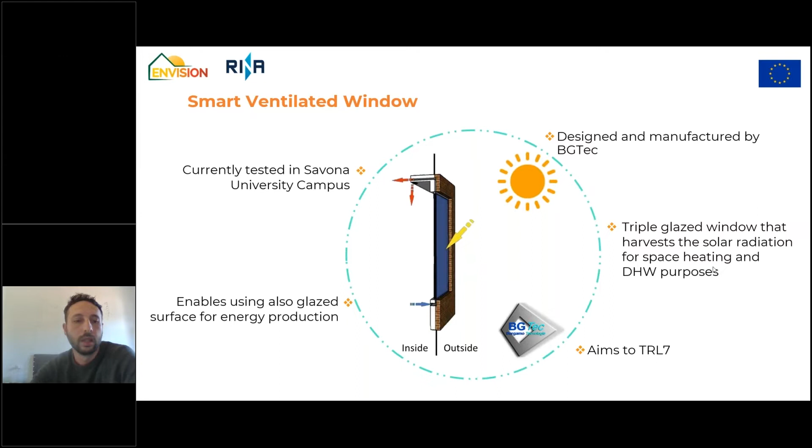This is just a brief introduction of the concept and working of this technology. This technology operates in 2 conditions. The first is winter mode, where the indoor air is heated up inside the window to provide warm air for the indoor ambient. The second configuration is summer mode, where the aim is to produce warm or hot water for domestic hot water purposes, or if needed, for preheating for heat pumps and so on.

During winter mode, we heat up the indoor air. When we move to summer mode, we use the outdoor air, and by heating up this outdoor air, we give this heat to the water cycle circuit, turning on the pump so that we are able to provide hot water for the needs.

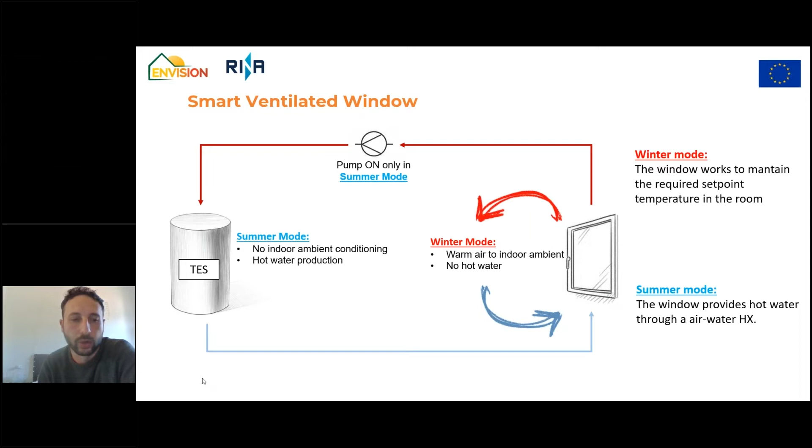A brief presentation and description of the technology. This technology is mainly developed and manufactured by BGTec with the support of some partners regarding the automation of the system. The main aim of this technology is to use the glazed surface of an envelope in order to provide heat from the solar radiation.

One of the main inputs we developed inside this project is an automated system control in order to provide heat inside the room at the required temperature using a set point, a thermostatic control. At the same time, we are able to switch automatically from winter mode to summer mode, depending on the temperatures inside the window and the required temperature inside the room.

The main innovation of this technology is that we are able to provide heat using the glazed surfaces of a building, but at the same time reduce the energy demand of a building thanks to this triple glazed unit. We are also going to test the impact of having this flow rate in the chamber of the window, which can be even better in terms of insulation for the building.

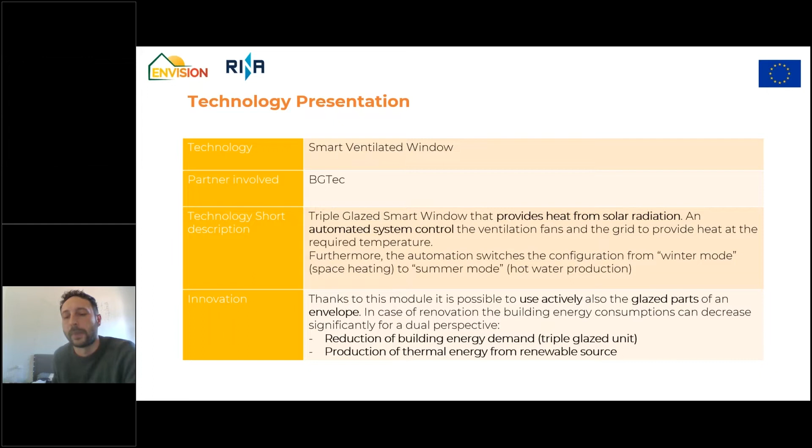The potential of this technology, we think, is mainly for offices or terminal buildings, but in general every kind of structure or envelope with a large glazed surface. We can implement this technology in both public and residential buildings, and as well in case of retrofitting, the renovation of old buildings, but also in new constructions.

BGTec has already developed a market trend study starting from next year in order to understand the possible value on the market and the request from the market for these technologies. Potential customers are similar, I think, to all the other technologies that have been presented inside this event.

Mainly private building owners, but also social housing companies. I think that having a good interaction with architects and engineers is probably the best way to introduce this technology into the market, without the risk of making the customer quite scared about the implementation. With the help of architects and engineers, we should be able to make this easier for the final customer.

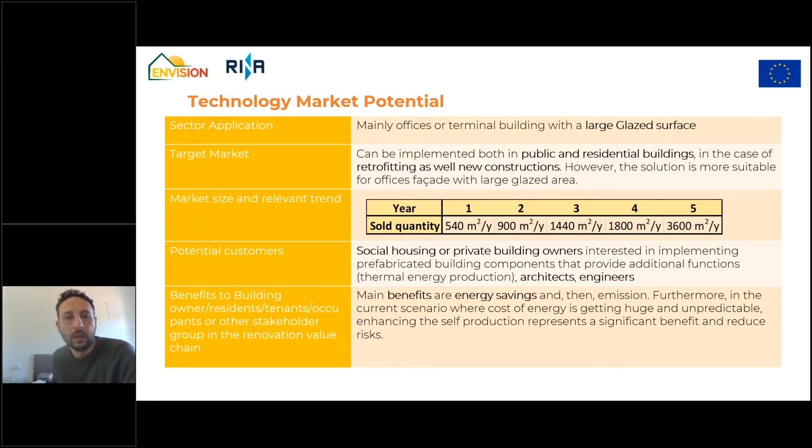Now let's move to more practical things: how the design and installation phase has been done. Here I would just like to show you some pictures from one of the installations that has been done by BGTec. This is from their headquarters in Poland.

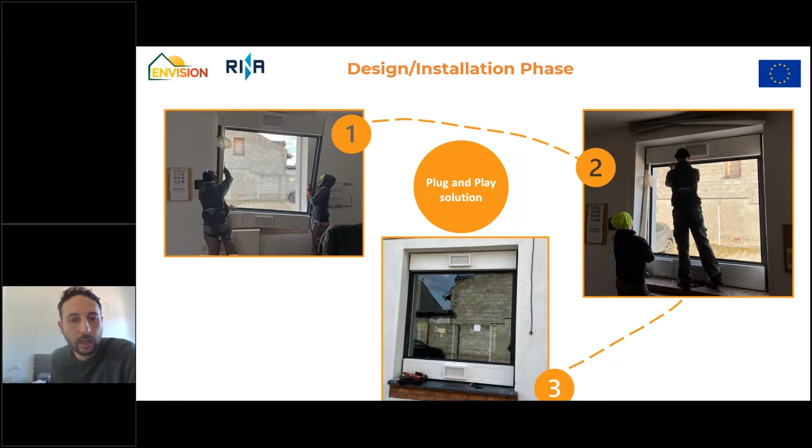As you can see, the installation of this technology is quite simple. It's a plug and play solution. In just three steps, you are able to install this technology, so the impact on the comfort of the tenants is minimal. In one day, they are able to complete the installation without any risk for the tenants.

And then I will just like to focus on the real demo site of ENVISION, that is the Savona campus demo site, where the window has been installed for testing it. So here you have the external view, the internal view.

As you can see, we have tried to maximize the glazed surface of the window, so we have quite a different aspect. If we compare this to the other window that you can see here, the other window is quite different, but in this case we wanted to maximize the glazed surface.

We have just started this testing campaign, from March 2022, and we are going to end this testing campaign in September 2022. That is going to be the end of the project.

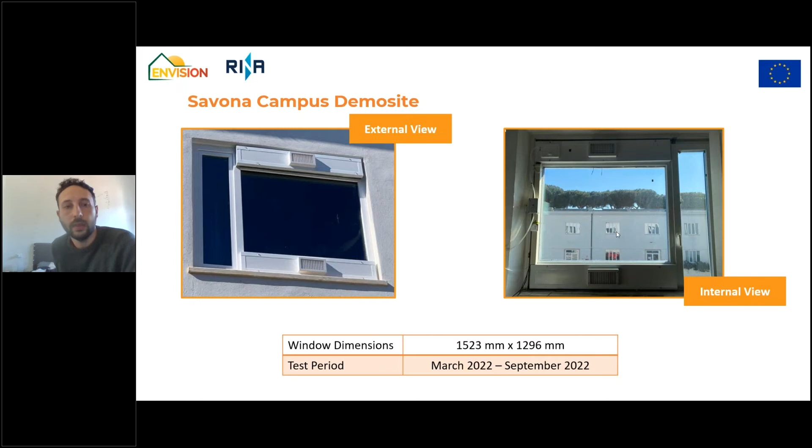So here you can see the behavior and the components of the technology of the window. On the left side is the water circuit filled with water and glycol that is going to be used in the summer mode, and also the pump right here inside this box. On the top part of the window, you can see the box where there is the control system, and then the two grids on the indoor side.

So the suction grid and the blowing grid. The air comes into this grid and is blown from the upper part of the window. During the summer, as I said, the indoor grids are closed and the ones in the outdoor part are opened, so that we recirculate the outdoor air inside the chamber of the window.

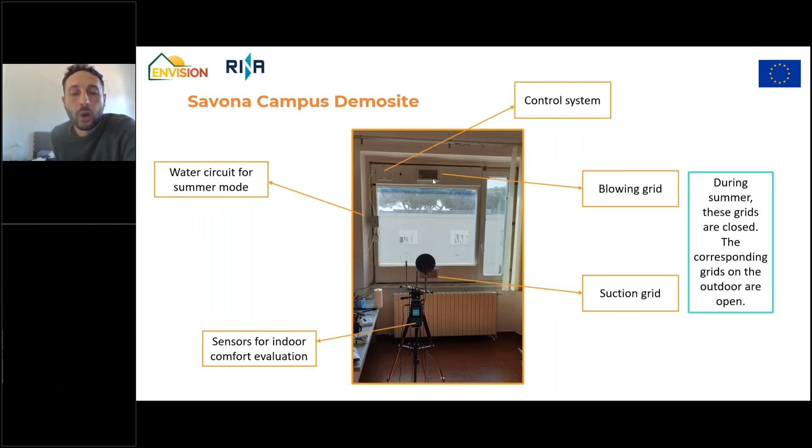In order to test properly all the performances of this system, we have also installed a sensor that you can see right here for evaluating the impact on the indoor comfort of this technology. With this sensor, we are going to see if there is any impact, really in reality, on the comfort of the occupants of this room.

Let's move now to the expected energy benefits that we hope to reach with these technologies. So we expect to have something like 140 kilowatt thermal energy production per square meter when we talk about a south-oriented facade on an annual period.

This leads, of course, at the same time to a saving of around 32 kilograms of CO2 if we think that this energy is usually produced by a gas boiler, a standard gas boiler.

And we have tried to estimate what can be the ratio between the surface of the window compared to the surface of the building, the floor area of the building, in order to understand when the thermal consumption of the building could be, on a yearly basis, completely supplied by the window.

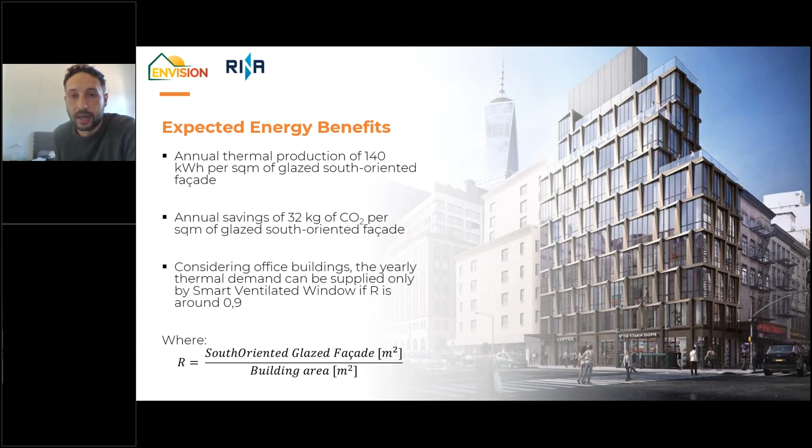And we have seen that this ratio is quite large, so that's why we suggest and expect that the main exploitation of this technology can be used in very large glazed surfaces, something like terminals or skyscrapers and something like this.

Then, of course, if we have energy benefits, we will have also economic benefits, and this is what is important to share more with the customer, because sometimes they are more interested in the economic savings despite the energy. They don't have the same feeling for just energy saving and emission saving.

So we have estimated the cost of around 300 euro per square meter of glazed surface for this technology, and so the expected payback time is around 23 years. Considering that the lifetime of this technology can be expected around 25, even 30 years, this is quite a good result.

But we have also to consider that if you take into account also the increasing cost of energy, probably this payback time can also decrease. But we have also to think about the impact that this energy cost can have on the production of this technology. We expect that the balance of costs will lead to a reduction of the payback time.

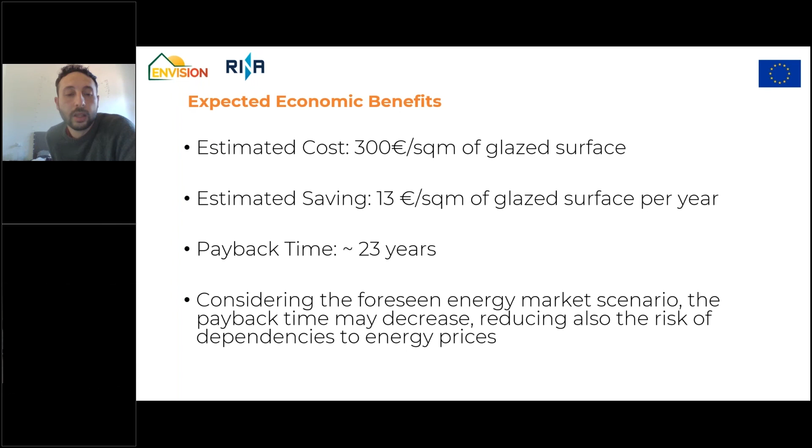Just as a conclusion, before I leave the floor for any questions about this technology: we think that having the chance of using this technology, this window, could represent a really relevant step toward the goal of zero energy buildings, since we are going to be able to use also the glazed surfaces for thermal energy production.

The aim of the test campaign that we are doing at the Savona demo site is to have real performances on the field about this technology, and being sure that the expectations that we have from the modelization and simulation of this technology are real also in the test campaign. So, to be sure that what we are saying is confirmed by the performances on field.

And therefore, we think that this technology can be really a great opportunity for the renovation of the target buildings that, as I said, in our opinion, can be mostly offices, terminals, and any kind of building where the glazed surfaces are very much larger than normal residential buildings.